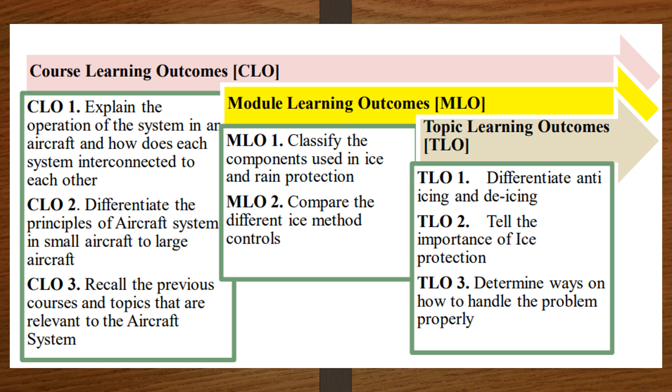So for today's discussion will be all about ice and rain protection, which is ATA chapter 30. Ice and rain protection is a critical aircraft system, as I said last time, and as I keep repeating every discussion, it's important that you know which ATA chapter corresponds with this aircraft system. Example with this ATA chapter 30, ice and rain protection.

Sir, why is it important to have ice and rain protection? So our aircraft is flying above, for example, 10,000 feet, 20,000 feet, 32,000 feet, above 40,000 feet, and at that altitude, we experience low temperature. So if we don't have this ice and rain protection, it becomes a risk for the formation of icing. And ice and rain protection, let me use a pen. So ice and rain protection enables aircraft operation in icing condition and heavy rain. That's why it's important. So as altitude increases, air temperature decreases.

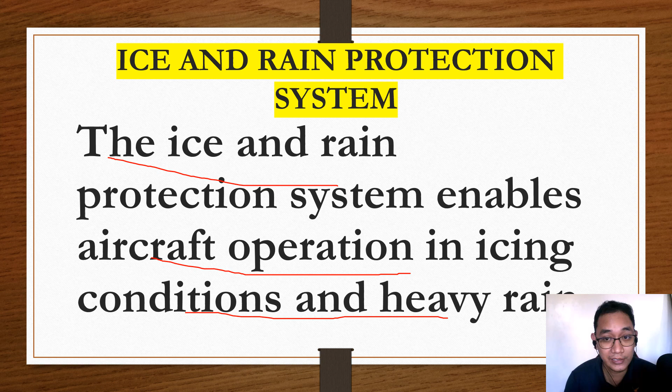Okay, so what are the hazards in icing formation? First is malformation in our airfoil that could decrease the amount of lift, especially in small-bodied aircraft. Although for small-bodied aircraft, operation is not allowed when there's an icing condition, or in countries that have winter. Another one is the icing formation causing additional weight and unequal formation of ice that could cause unbalancing in our aircraft, making it hard to control. And another one, especially in wide-body aircraft nowadays, like the Airbus fleet and Boeing fleet, is our sensors. If our sensor has icing formation, it won't function in its normal configuration or normal operation. So we have risk and hazard that may lead to unsafe flight and operation.

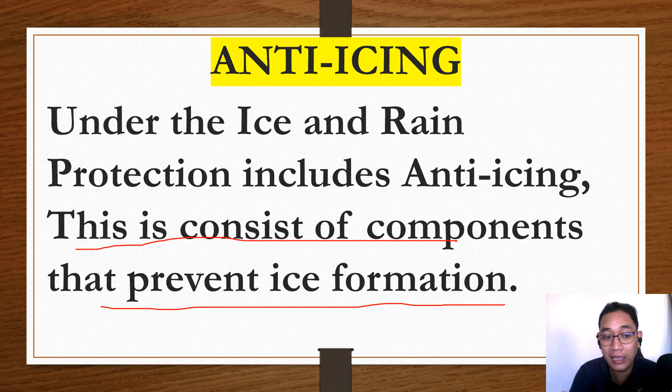So back to anti-icing. The first component for anti-icing in our aircraft, example here is Airbus, is our wing thermal anti-ice. If you remember our discussion on the pneumatic system, at the leading edge of our wings on Airbus aircraft there are bleed air supply ducts. Meaning once the engine is activated, there will be flow of bleed air to the bleed air supply ducts located at our leading edge of the wing, leading to anti-icing, meaning it is heated by means of pneumatics or bleed air. Okay, so this is what sir mentioned. Wing thermal anti-ice - the pneumatic system provides means for anti-icing for our 3 outboard leading edge slats of each wing. So don't forget that.

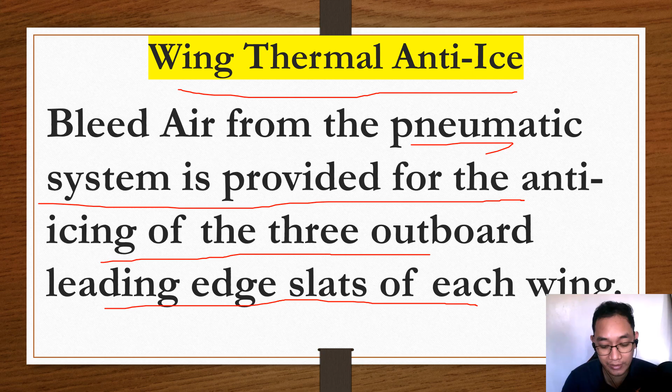Okay, next is the inlet cowling or engine intake anti-icing. There's a valve there, the engine anti-ice valve. It allows bleed air to flow to provide heating so our inlet cowling gets warm, leading to anti-icing - so the possibility of ice forming on our intake cowling is negated.

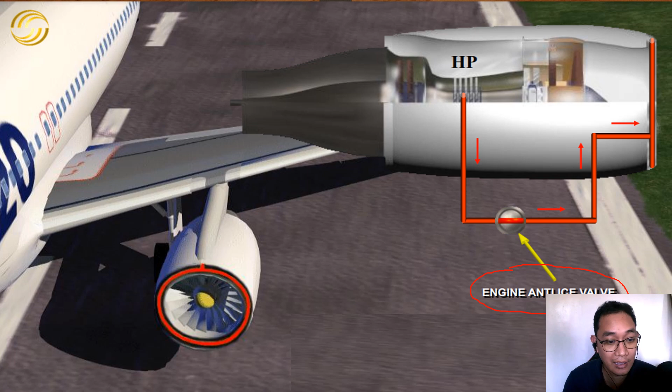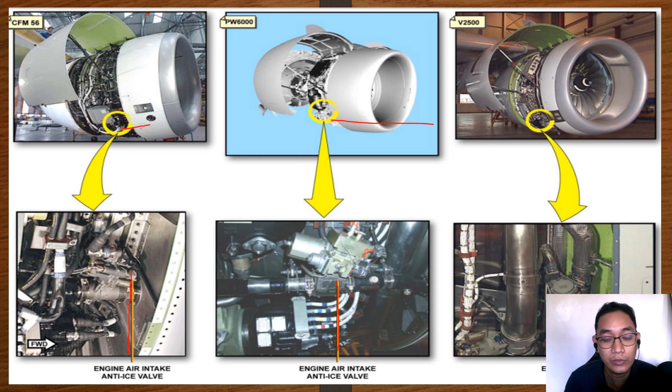Okay, so this is the appearance or position of our engine air intake anti-ice valve, as you can see on our screen. So on the CFM56, it's located here. On the Pratt & Whitney 6000, it's located here. And on our V2500. So these are more commonly used on Airbus aircraft.

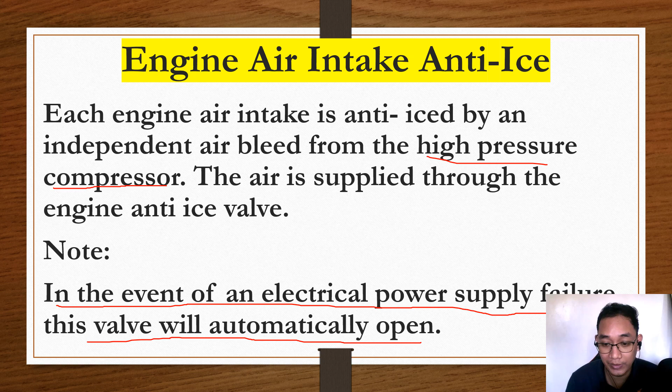Okay, if you remember our discussion on the pneumatic system, where does it get the bleed air used by the pneumatic system? Because from that same area, this engine air intake anti-ice valve or our inlet cowling anti-icing also gets it - from the high pressure compressor. Take note, in the event of an electrical power supply failure, this valve will automatically open, meaning it still has anti-icing.

Okay, so next is our probes. Our probes in the aircraft also have anti-icing. But they are not pneumatically heated - they are heated by means of electricity. Meaning electrically heated.

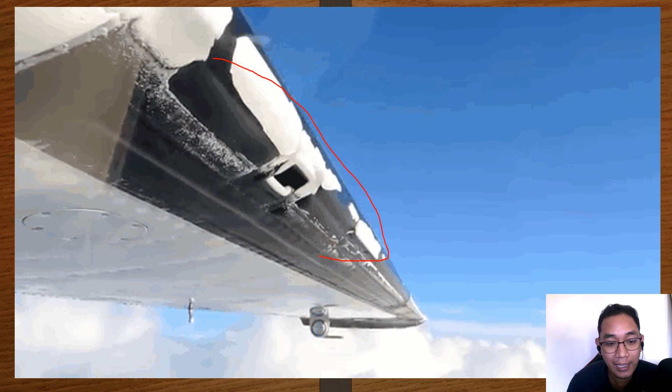Okay, so our pneumatic rubber de-icer boots have a control in the cockpit. So when you push the on button, it will inflate. When you push the red button, it will deflate.

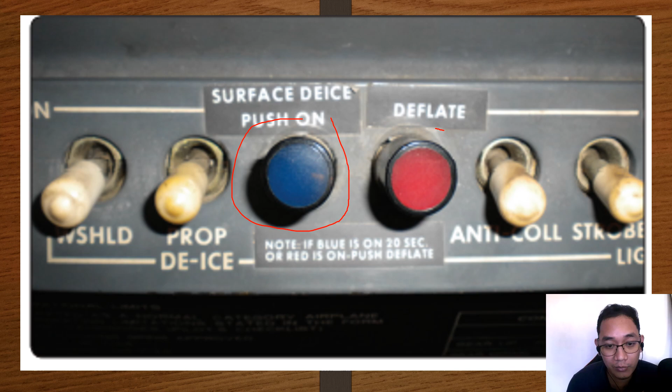So when ice buildup forms on the leading edge, an engine-driven pneumatic pump inflates the rubber de-icer boots. De-icing boots are controlled on the flight deck, as mentioned earlier - blue button for inflation, red button to deflate.

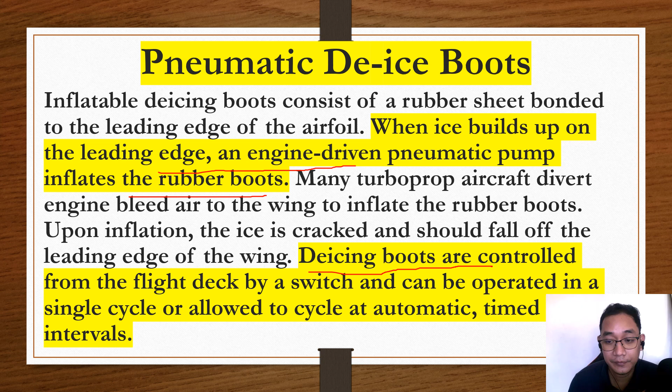Okay, so next is an aircraft that uses a combination of electricity and vibrating metal - electromechanical expulsion de-icing. Presenting the Raytheon 390 Premier 1.

Again, what de-icing method is used here? Electromechanical expulsion. Meaning there are coils behind the leading edge of our wings. When turned on in the cockpit, the metal coils will vibrate, causing ice to break off.

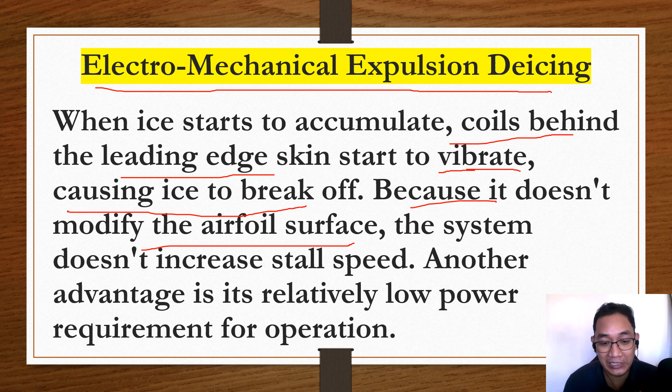Because it doesn't modify the airfoil surface, our aerodynamics stay smooth - unlike the rubber de-icer boots where the airfoil shape changes since it inflates and deflates. So this electromechanical expulsion system is located inside our leading edge.

Okay, next is ice detection, more common on wide-bodied aircraft. We have an ice detection sensor located at the forward part of the aircraft and at the forward lower part.

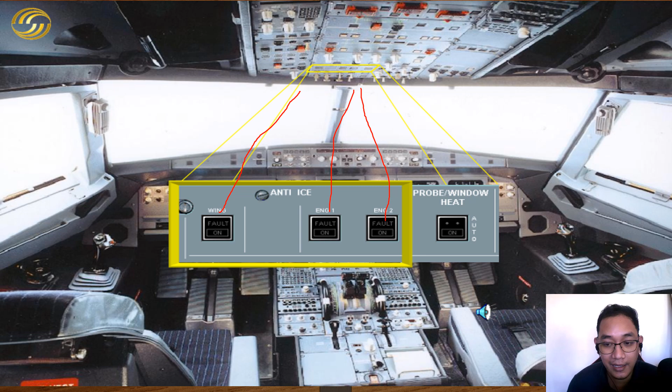Okay, so again, all ice and rain protection controls are located on the overhead panel. The crew manages wing and engine anti-ice valves through the anti-ice control panel, and all the electrical heating systems through the probe window switch. This is it.

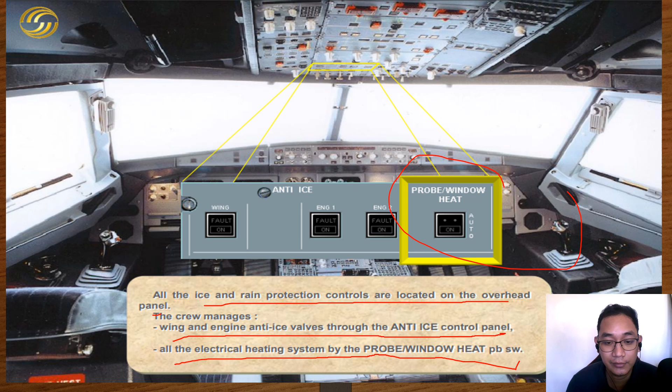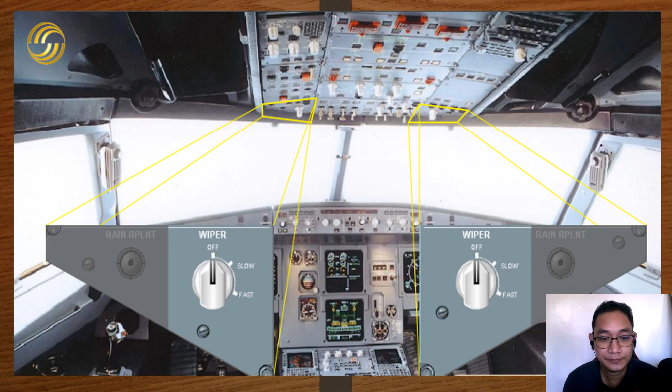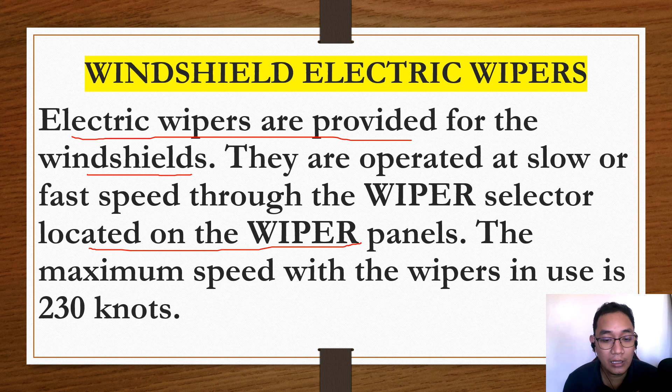Electrical wipers are provided on the windshield. They are operated slow or fast through the wiper selector located in the wiper panel. Sir, how fast is the maximum speed? 230 knots - that's how fast it is.

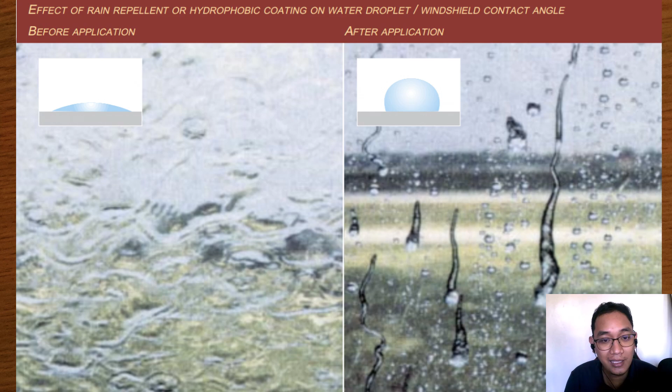All of our aircraft systems, even the structures, have redundancy. So, chemical rain repellent - an in-flight applied windshield rain repellent system has been developed, which provides improved visibility when flying in rain conditions.

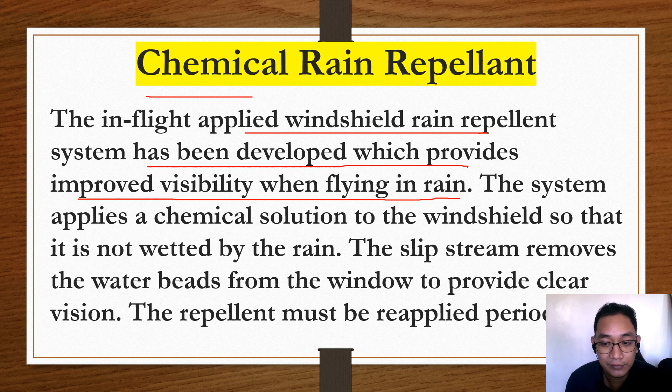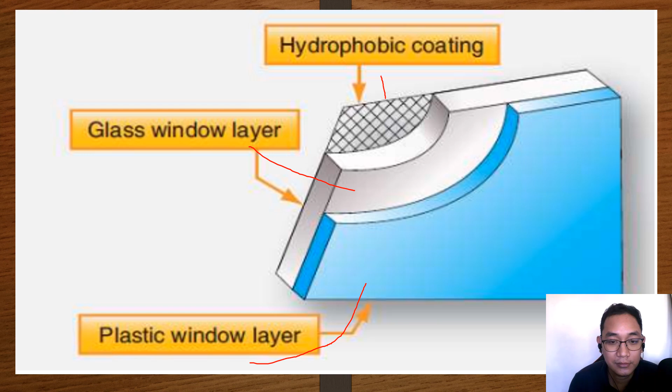Okay, this is what sir mentioned as the hydrophobic coating. This is the hydrophobic coating, this is the glass window layer, and this is the plastic window layer.

So what does the hydrophobic coating do? For example, this is the surface, and this is the rain - the rain will just bounce off. That's the operation of the hydrophobic coating.